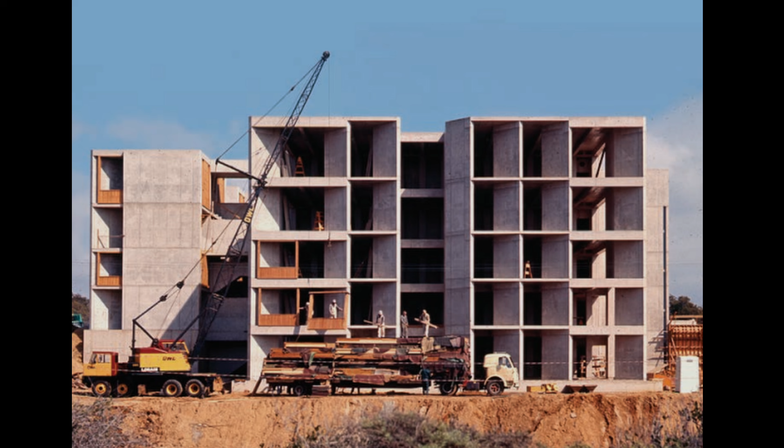Design work began in 1959 under the direction of architect Louis Kahn. Construction commenced in 1962, and the buildings were completed by 1965. Researchers began work soon after completion. The central courtyard, however, was not fully resolved at that time. The travertine paving and narrow water channel were completed later, and the institute was formally presented once the courtyard had been finalized.

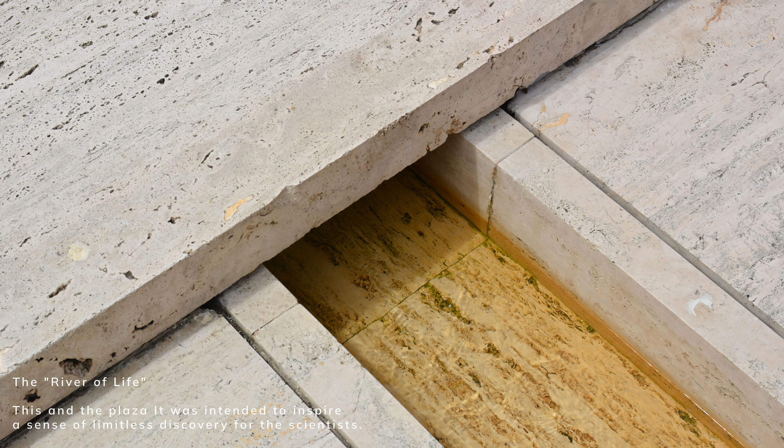Section 3. Authorship. The building was designed by the architect Louis Kahn. Kahn spoke about the institute not simply as a place of science, but as a building shaped by the nature of scientific work. He described it in the following terms. A building is not just a place to do work, but a place that understands the nature of that work. The laboratories are the servants of the spaces where the mind works. These statements guided the architectural character of the institute.

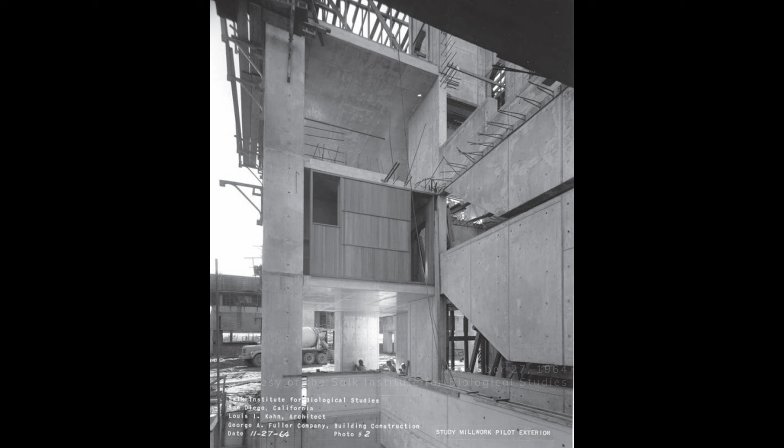Section 4. Historical and Cultural Context. The building was conceived during a period of expanding scientific research infrastructure in the United States. This period coincided with the Cold War, when scientific and technological capacity was closely tied to national priorities. Large-scale research initiatives increasingly received federal support, and purpose-built institutional environments for long-term scientific work became more common. Within this context, the establishment of a permanent biological research institute reflects broader institutional and cultural conditions rather than an isolated initiative.

The institute was established at the same time as the formation of the University of California in San Diego and the expansion of other research institutions on the Torrey Pines Mesa. The area was developing into a concentrated research campus during this period.

Section 5. Materials and Construction. The primary structural material of the building is reinforced concrete. Concrete is used for load-bearing walls, floor plates, and major structural elements. Following removal of the formwork, the surfaces were left exposed without applied finishes or coatings, resulting in a visible record of the casting process. Variations in color are present across the structure, reflecting differences in material composition rather than surface treatment. Lead inserts close the form tie openings in exposed concrete walls, producing a consistent surface condition.

Glass is used extensively at laboratory facades, allowing daylight to enter working spaces. Steel appears in structural supports, window frames, handrails, and interior fittings. The structural system allows laboratory floors to span without internal columns. Mechanical, electrical, and plumbing services are housed within dedicated service levels between laboratory floors, enabling internal reconfiguration without disruption to adjacent spaces. The building's materials have aged through prolonged exposure to marine air, fog, and salt. Maintenance and preservation work has been undertaken over time to address long-term material performance.

Section 6. Overall Form and Appearance. The building consists of two parallel, six-story laboratory structures arranged symmetrically on either side of a central open courtyard. Each structure extends approximately 75 meters or 245 feet in length. The two buildings face one another across the paved courtyard, which measures approximately 30 meters or 100 feet in width.

From a distance, the buildings read as low, horizontal masses set into the mesa. 2 floors of each structure are located below ground level, reducing their apparent height. Projecting from the main laboratory blocks are study towers arranged along the north and south sides of the courtyard. These smaller volumes extend outward and are connected to the primary structures by short bridges. Larger service towers are positioned at the eastern ends of both buildings, appearing as distinct vertical elements.

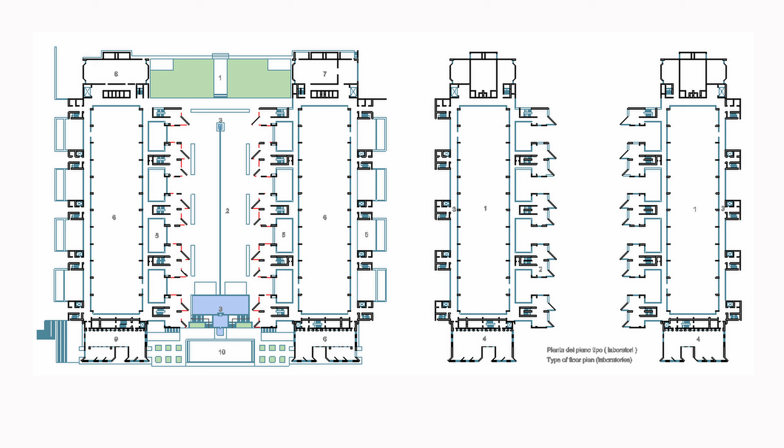Section 7. Spatial Layout and Function. The building is entered from the eastern side, where primary access points are located near the service towers. Each of the two laboratory structures contains 3 floors above ground and 2 below. Laboratory spaces occupy full-width floor plates and remain open without internal columns or permanent partitions. Service floors alternate with laboratory floors. Each laboratory level is paired with a dedicated service level located directly above or below it.

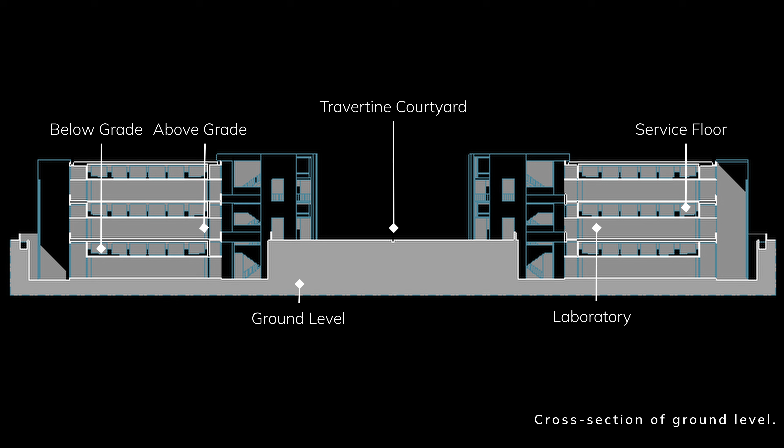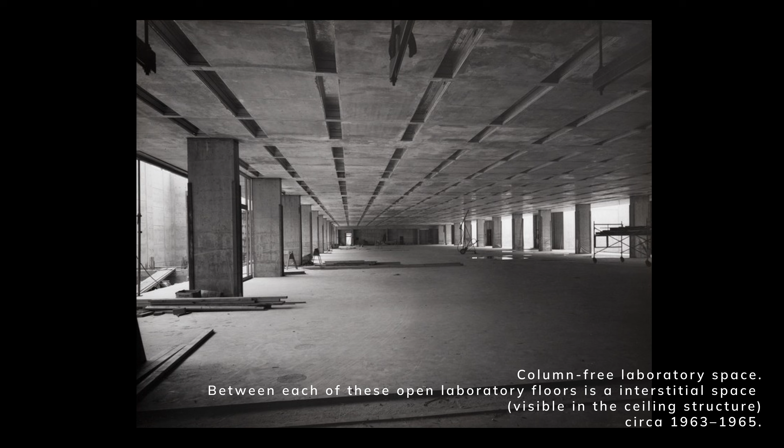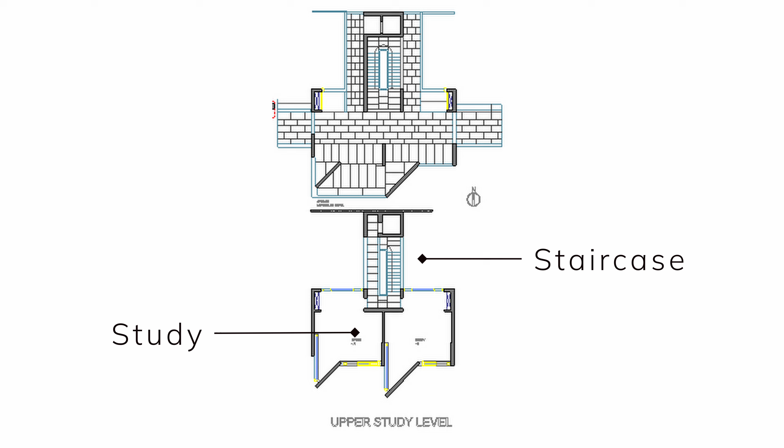These service floors are approximately 1.8 meters or 6 feet in height at their central sections and contain mechanical ducts, piping, electrical systems, and other infrastructure. Maintenance access to these floors is separate from laboratory spaces. Study towers contain individual workrooms measuring approximately 3 meters by 3 meters or 10 feet by 10 feet. These spaces are accessed by staircases connecting them to the main laboratory floors.

Office spaces are located toward the western ends of each building. A library occupies the ground floor at the eastern end of the north building. An auditorium and trustees' room are positioned within basement levels. The central courtyard functions as both a circulation route and gathering space, providing direct passage between the two buildings while maintaining visual continuity across the site.

Section 8. Light, Sound, and Sensory Conditions. Natural light enters the laboratory spaces through glass walls positioned along multiple sides of each floor. Laboratory levels located below grade receive daylight through sunken perimeter courts. These allow natural light to reach the lowest occupied floors. Study towers receive light through west-facing windows that admit directional afternoon light. The quality of light in these rooms differs from the broader illumination of the laboratories.

In the central courtyard, light is unobstructed. Sunlight falls directly onto the travertine paving, exposed concrete walls, and the channel. Acoustic conditions vary across the complex. In the courtyard, sound includes the movement of water and wind passing through the open space. The openness of the courtyard reduces echo and sound reflection.

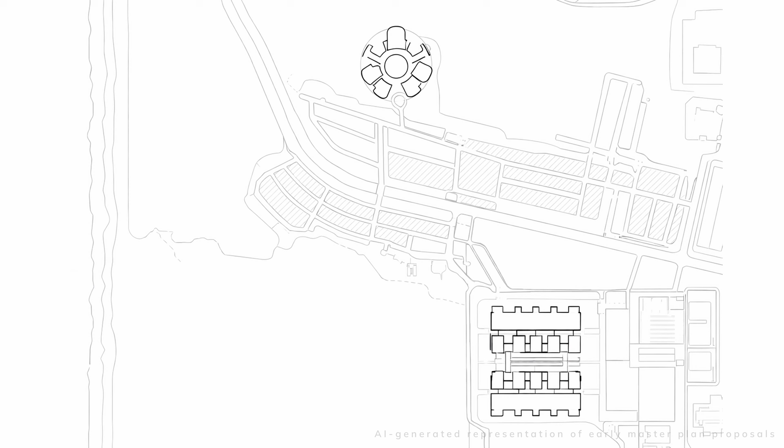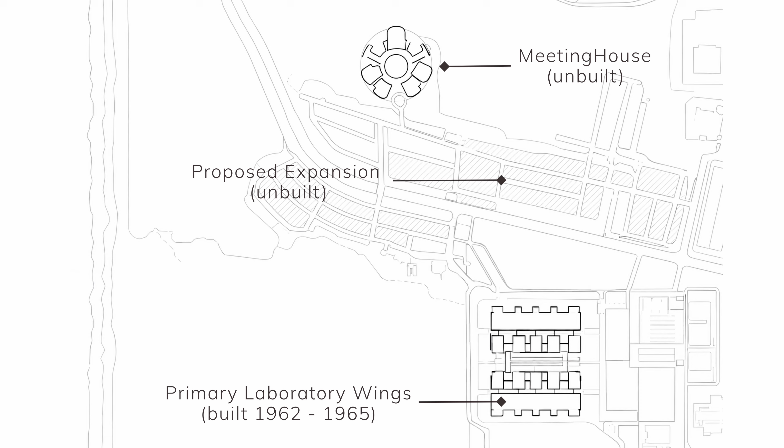Section 9. Changes over time. The original master plan included additional components beyond the laboratory buildings. These elements were not constructed, and the site was developed with only the 2 primary laboratory structures. In the 1990s, additional laboratory and administrative buildings were constructed elsewhere on the campus. These buildings are separate from the original structures.

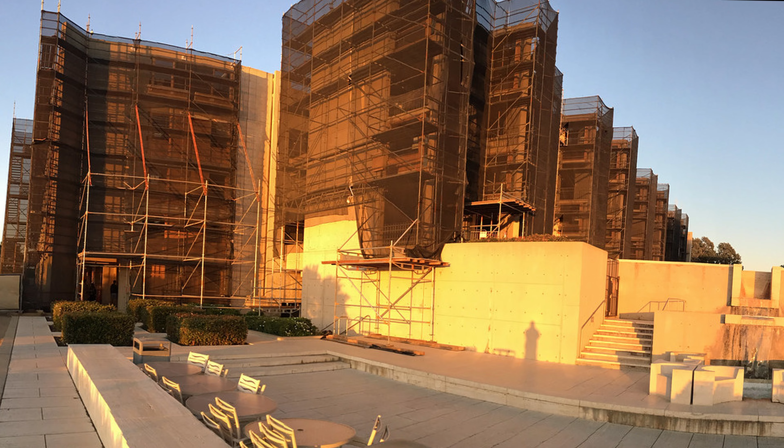Between 2014 and 2017, conservation work addressed deterioration of the teak window assemblies. A majority of the original wood was retained, with limited replacement where necessary. The building's structural systems and service floor arrangement have allowed interior spaces to be updated over time without major alteration to the overall architecture.

Section 10. Significance and Legacy. The building opened in 1965 and has remained in continuous use as a research facility. Its architectural organization, separating laboratory floors from service levels, has been referenced in later institutional buildings, where flexibility and long-term adaptation are required. The use of exposed concrete as both structure and surface represents one approach to material expression in large research facilities.

Public access to the exterior courtyard has been introduced over time, allowing visitors to experience the spatial composition directly. An inscription within the institute reads, in the words of Jonas Salk, "Hope lies in dreams, in imagination, and in the courage of those who dare to make dreams into reality." This was one building. Observed.